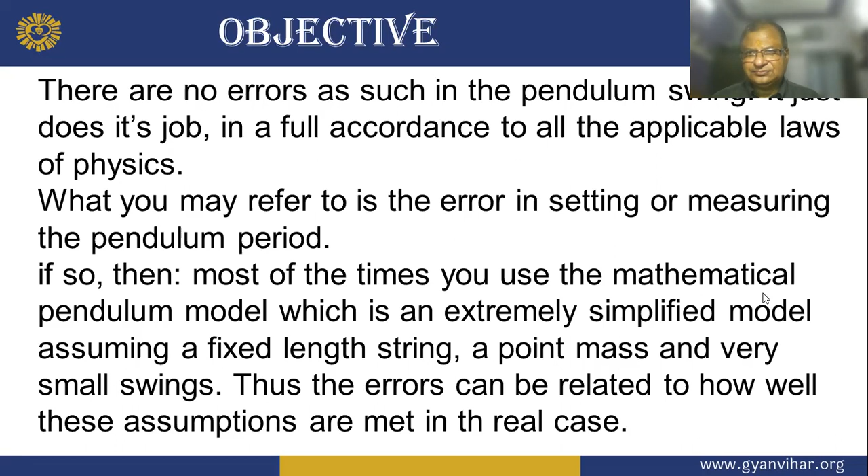The string may be a bit elastic and so change length with the load, or the pivot point may not be a single fixed point but will swing as well, which increases the effective length of the pendulum - use a fixed pivot with a string that does not stretch under load.

Also, the pendulum mass is not a point mass, as there is no such thing. So there may be error in finding the center of mass, plus there is some non-zero moment of inertia around that center of mass, which also changes the pendulum period compared to the ideal model.

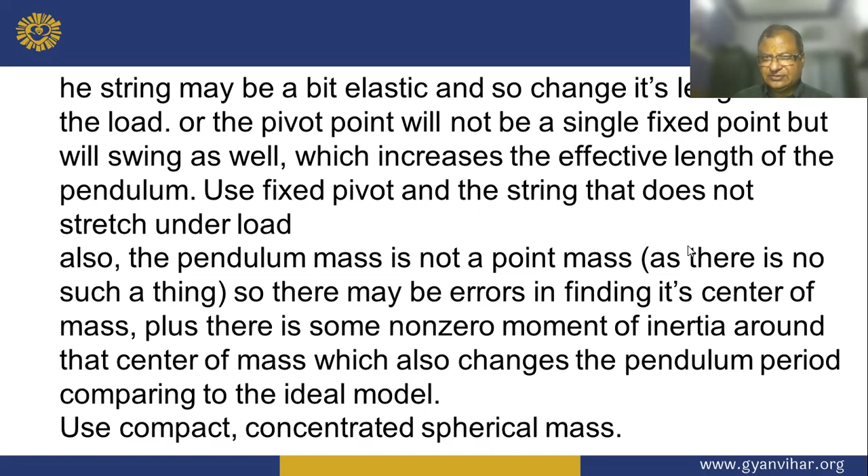Use compact concentrated spherical mass - the pendulum formula is only valid for very small swing amplitude, since usually the formula uses the approximation sine(x) is nearly equal to x for very small x. So use the smallest possible angle. Correct.

Air drag adds a damping force to the pendulum action, similar to adding a damping force to harmonic oscillation, which increases the period slightly. If you use a compact mass for the pendulum, this effect should also be minimized.

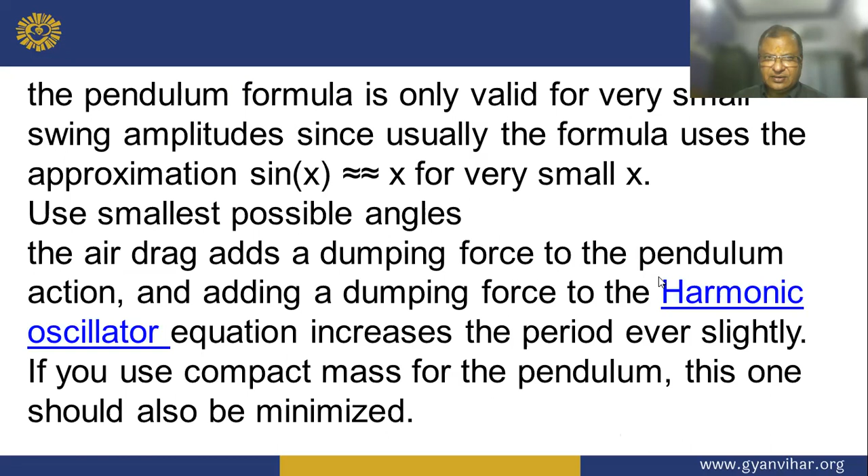Now, what is the definition? Deviation from the absolute value, or from the true average of a large number of results.

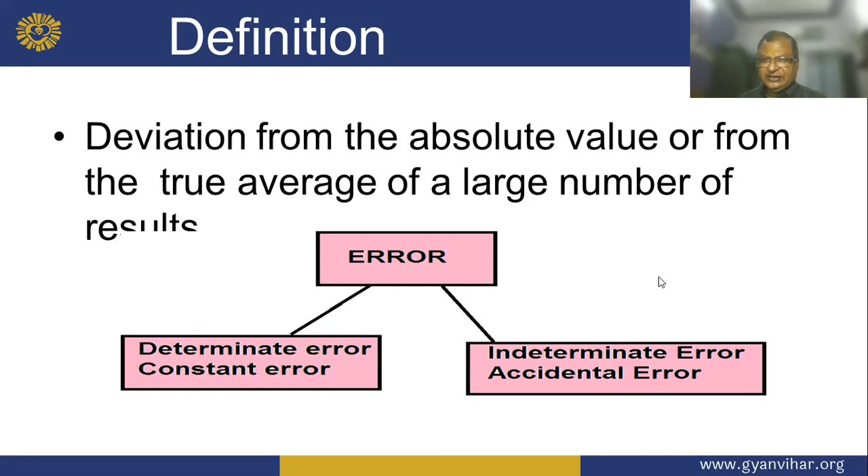So error types: determinate error and constant error, and here indeterminate error and accidental error.

Error in the calibration or operation of the measuring instrument, impurities in the reagent, error in reading, weighing error, and error in matching color and in calculation.

So biased personal error depends on these four factors.

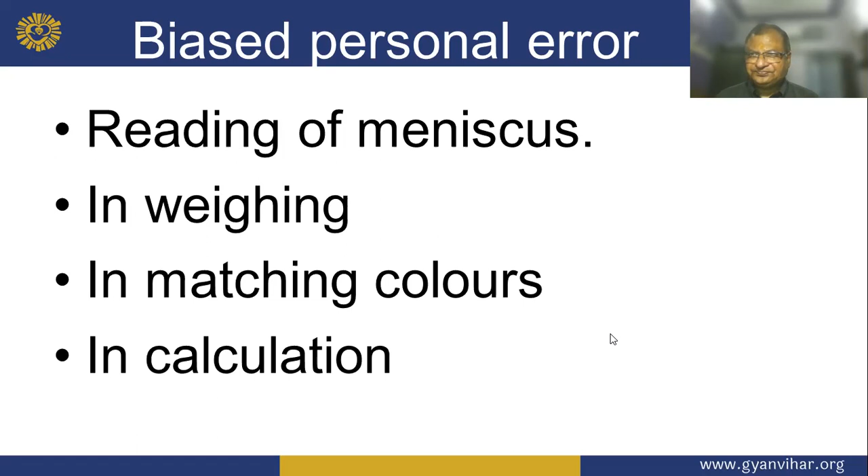Determinate error can be combated by use of calibrated apparatus, use of blanks and controls, several analytical procedures, eliminating impurities, and by carrying out the experiment under various conditions.

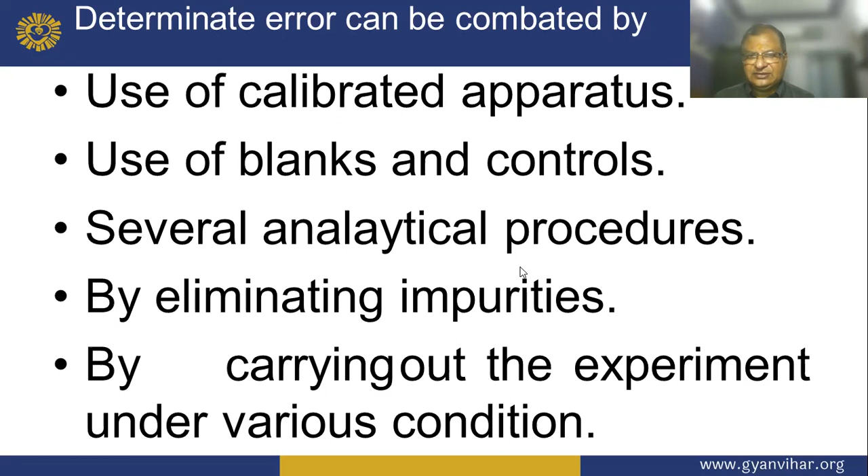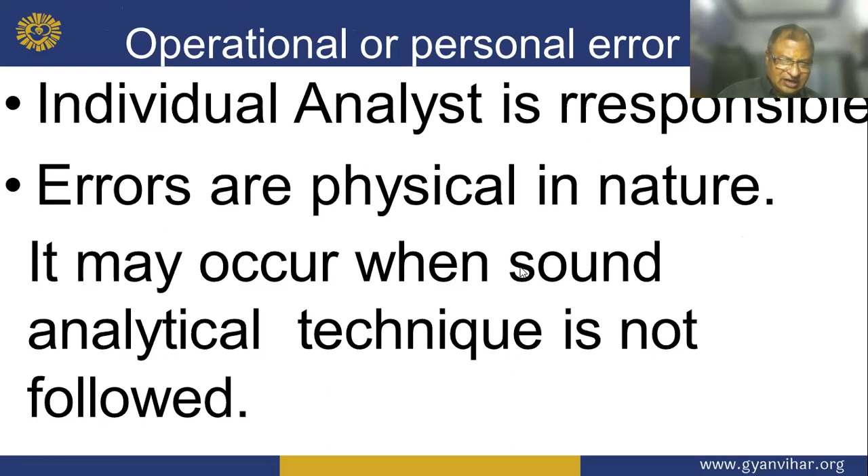And operational or personal errors relate to individual analyst is responsible - these errors are physical in nature. It may occur when sound analytical technique is not followed.

Now, examples of personal error: mechanical loss of material in various steps of an analysis, and underwashing or overwashing of a precipitate.

And ignition of the precipitate at incorrect temperature, and insufficient cooling of the crucibles before weighing.

And allowing hygroscopic material to absorb moisture before or during weighing, and use of reagent containing impurities.

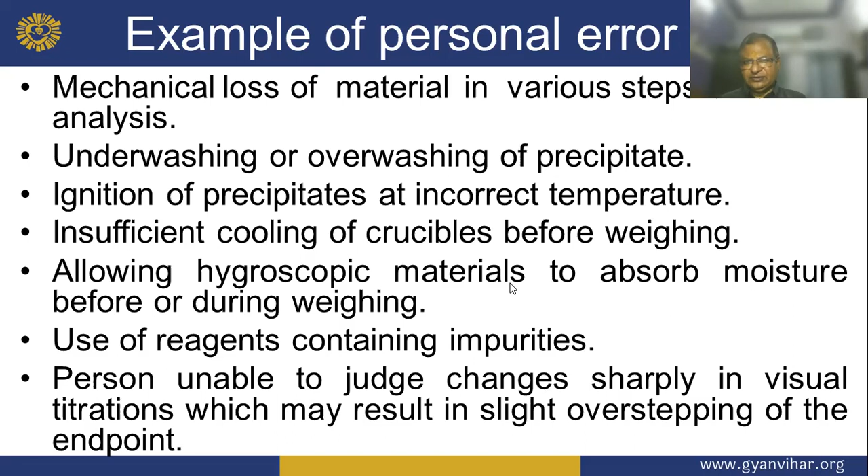Now we will discuss instrumental error: faulty construction of balance, reagent error - the attack of reagent upon glassware resulting in introduction of foreign material, and volatilization of the platinum at very high temperature.

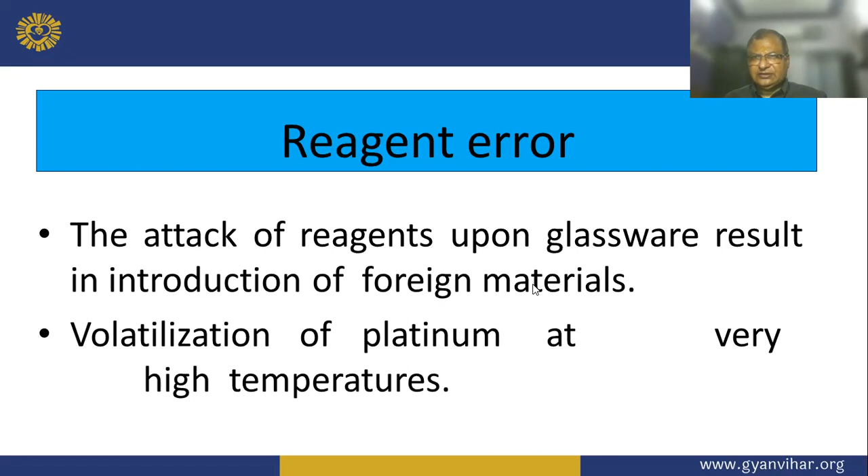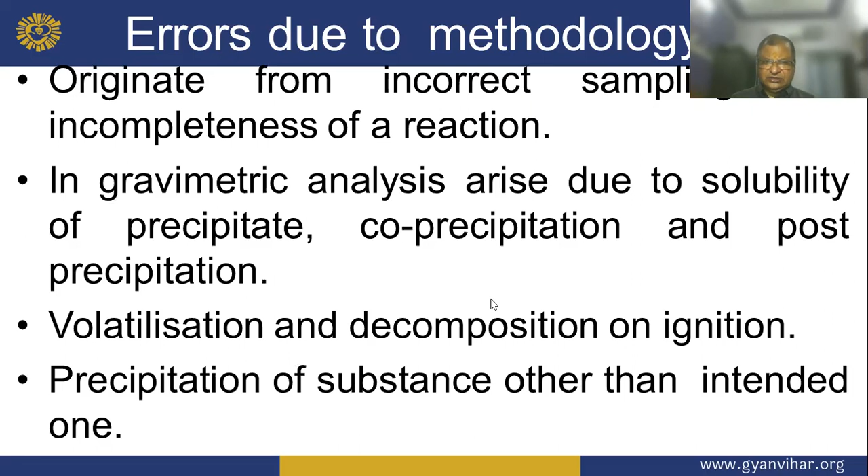So errors due to methodology originate from incorrect sampling and incompleteness of reaction. In gravimetric analysis, errors arise due to solubility of the precipitate, co-precipitation and post-precipitation, volatilization and decomposition on ignition, and precipitation of a substance other than the intended one.

Now, error due to methodology. In titrimetric analysis, error made due to the occurrence of induced and side reactions, and reaction of substances other than the constituent being determined, leading to differences observed and the stoichiometric point variation.

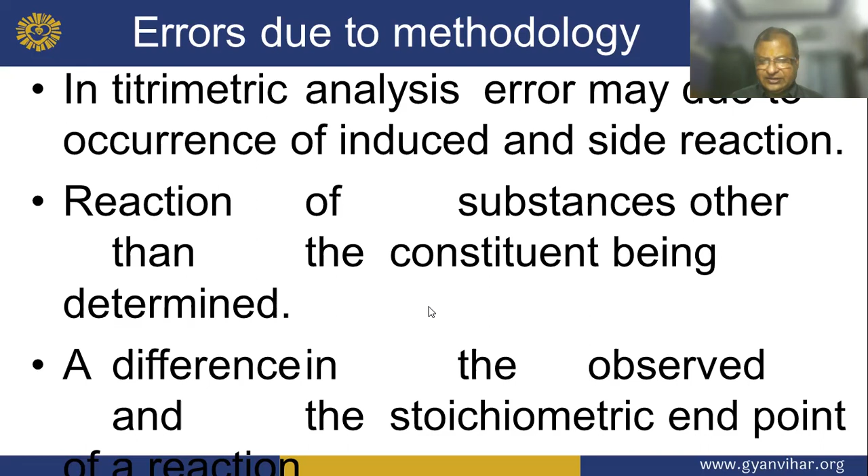Successive measurements made by the same observer under identical conditions produce slight variation and indeterminate error. So its elimination by the analyst is impossible, and error occurs by accident or chance. It cannot be allowed for correction because of the natural fluctuation that occurs in all measurements.

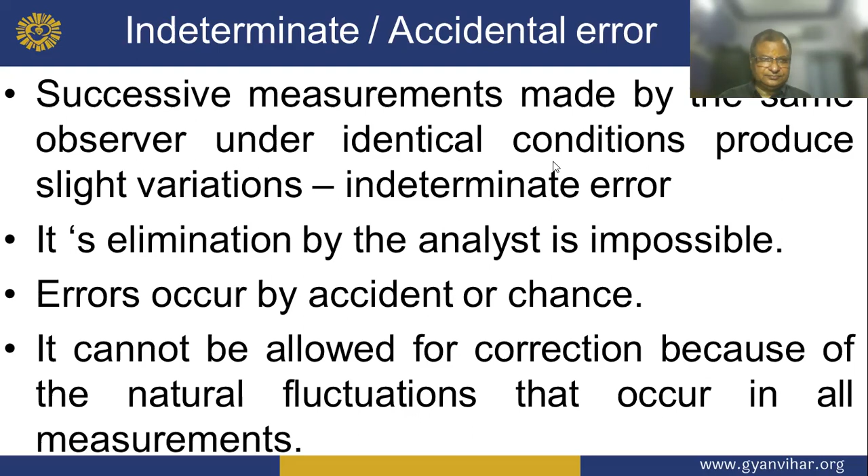These errors arise from random fluctuation in temperature or other external factors. These determinate errors are often called pseudo-accidental or variable determinate error. This error may be reduced by controlling conditions, through the use of a constant temperature bath and oven, employment of buffers, maintenance of constant humidity and pressure, reading fractions of a unit on graduates, balances and apparatus - this may reduce pseudo-accidental error.

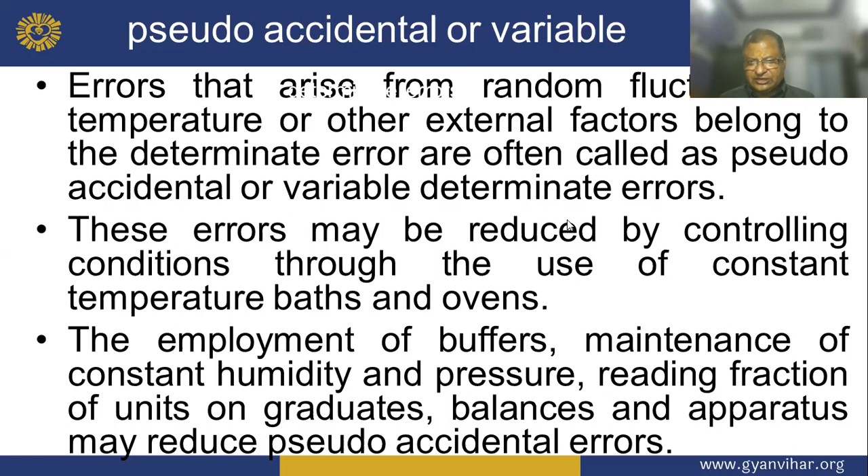Now, minimization of error. The calibration of the apparatus - all apparatus like weights, flasks, burettes and pipettes should be calibrated, so that the apparatus correction is applied to the original measurement.

In some cases, error cannot be eliminated, so a correction is applied for that effect, and impurity in a weighed precipitate may be determined and the weight corrected.

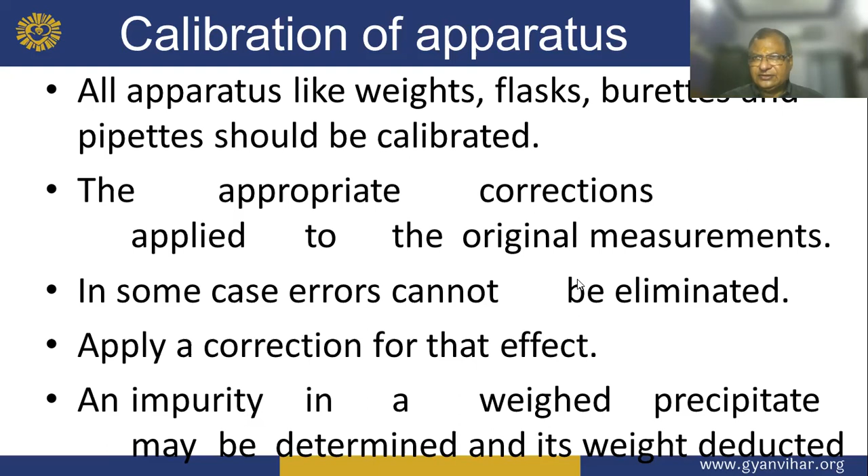Now, running a blank determination. It is carried out as a separate determination, the sample being omitted, under exactly the same experimental conditions as employed in the actual analysis of the sample. The object is to find out the effect of the impurity introduced through the reagents and vessels.

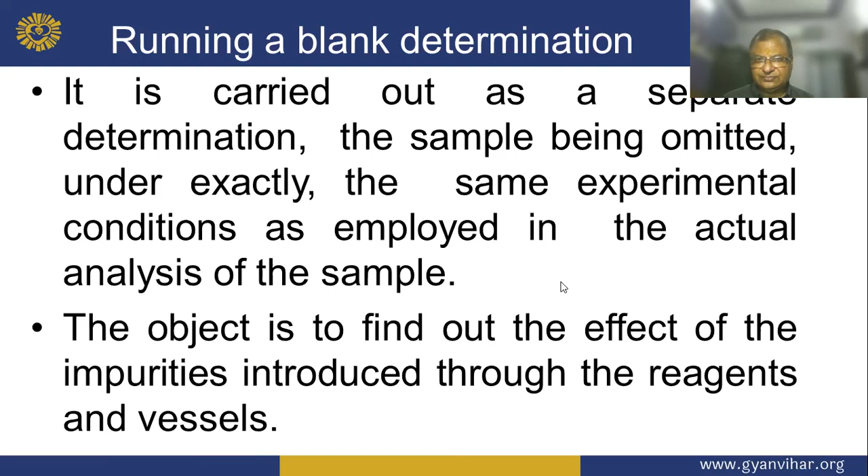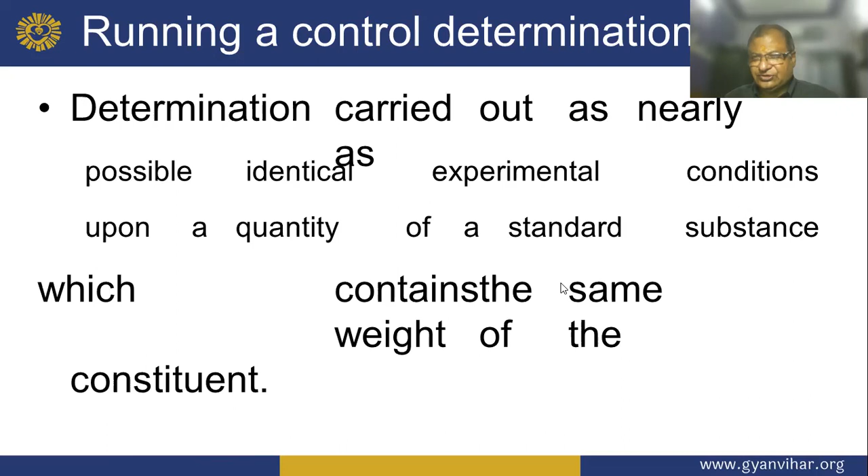Now, running of the control determination. The determination is carried out under as nearly as possible identical experimental conditions, upon a quantity of the standard substance which contains the same weight of the constituent. Determination of strength of HCl, both by titration with a standard solution of strong base and by precipitation and weighing as AgCl.

If the results obtained by two radically different methods are concordant, it is highly probable that the values are correct.

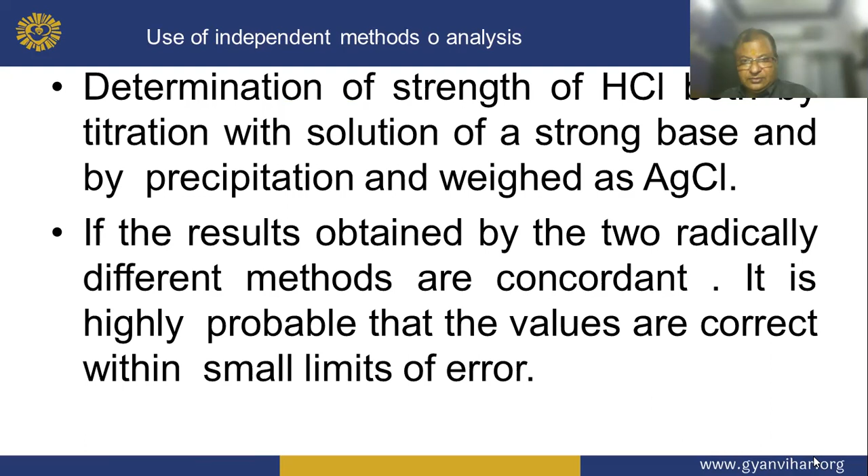It serves as a check on the result of a single determination and indicates only the precision of the analysis. The value obtained should not vary by more than 3 parts per thousand, and if a larger variation is there, it must be repeated until satisfactory concordance is obtained.

Now, duplicate, triplicate determinations suffice. A known amount of the constituent is added to the sample, which is then analyzed for the total amount of constituent present. The difference between the analytical result of the sample with and without the added constituent gives the recovery.

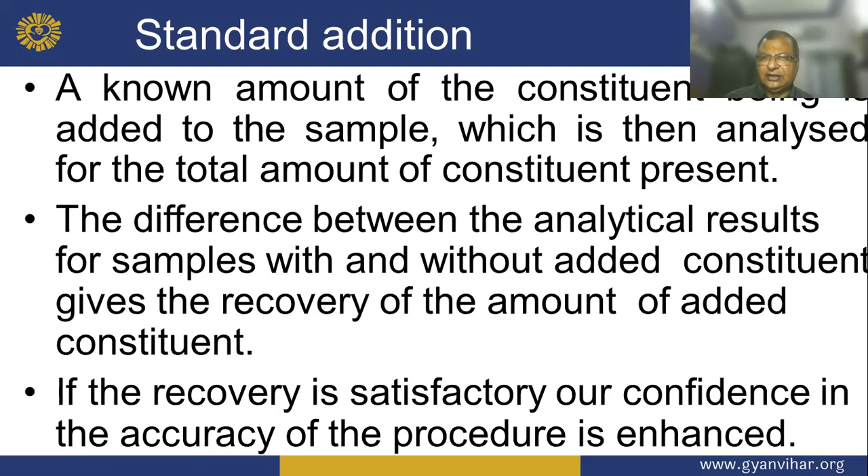Even under constant experimental conditions - same operator, same tool, same laboratory, short time interval between measurements - repeated measurement of a series of an identical sample always leads to results which differ among themselves and from the true value of the sample.

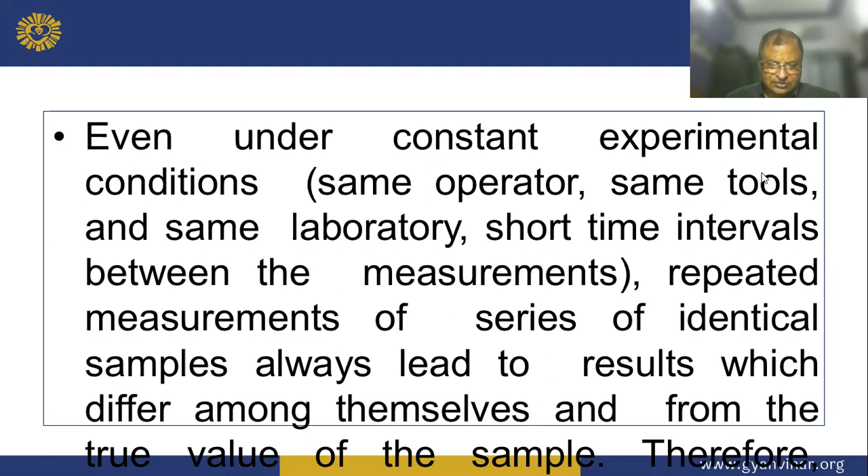Therefore, random errors are the component - measurement error that varies in an unpredictable manner in replicated measurements and measuring technique.

Measurement error that varies in an unpredictable manner in replicated measurements and measuring technique, that is the noise. Random error is the component of measurement error that varies unpredictably in replicated measurements and measuring technique - that is noise, sample property such as inhomogeneity, and chemical effects such as equilibrium, even under carefully controlled conditions.

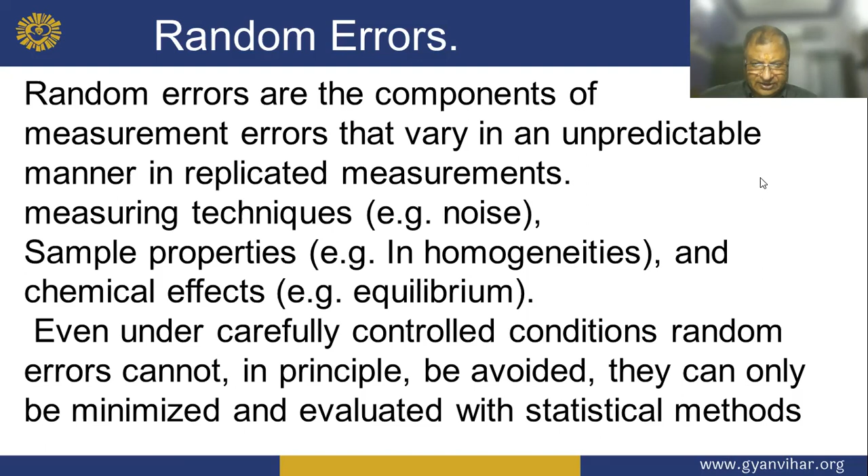Even under carefully controlled conditions, random error cannot in principle be avoided. It can only be minimized and evaluated with statistical methods.

The closeness of agreement between the results, according to their character and magnitude, is classified as random and systematic.

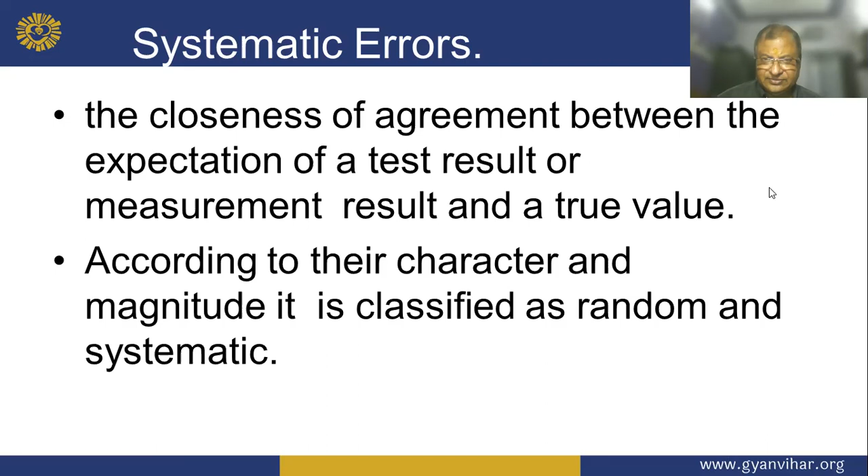Now accuracy: the concordance between the data and the true value. It is the agreement between the data and the true value.

If the true value is not known, the mean calculated from results obtained by several different analytical methods, which are very precise and in close agreement with one another, may be considered the value in a practical sense.

The difference between the mean and the true value is known as the absolute error.

The relative error is found by dividing the absolute error by the true value. So the difference between the mean and the true value is known as the absolute error.

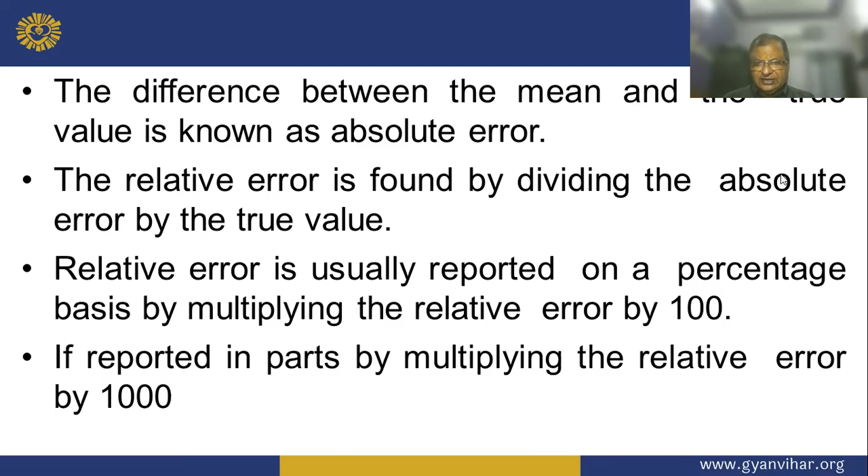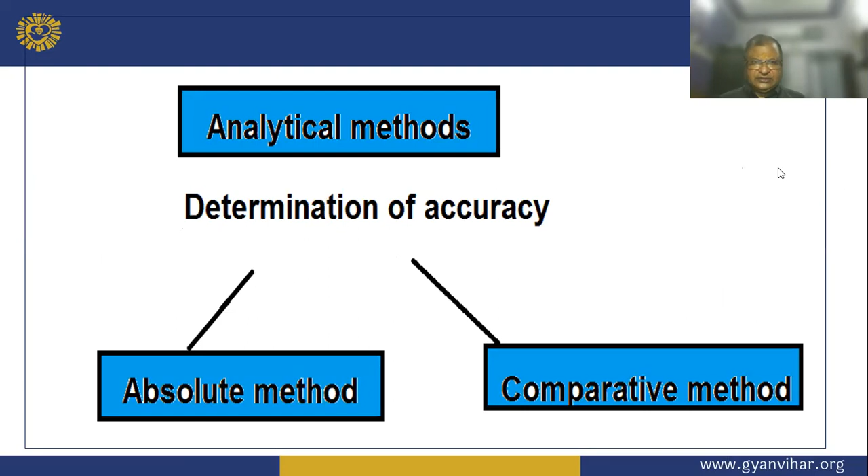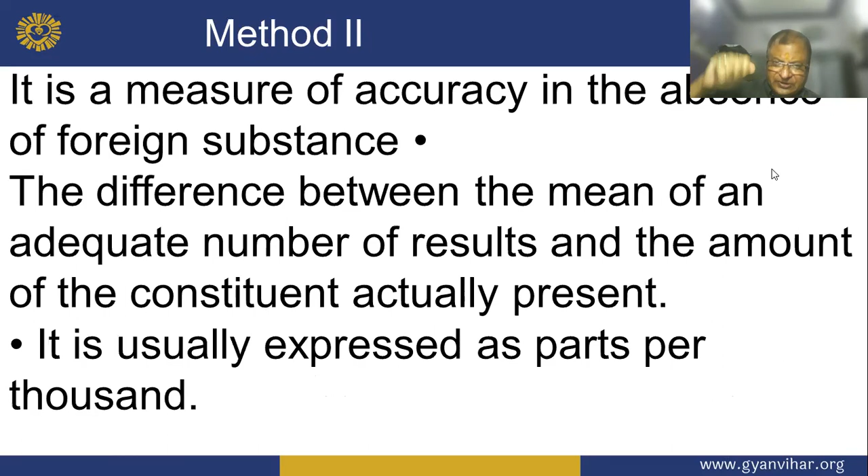Now, analytical method: it is the measure of accuracy, the absence of foreign substances, and the difference between the mean of the adequate number of results and the amount of constituent actually present. It is usually expressed as parts per thousand.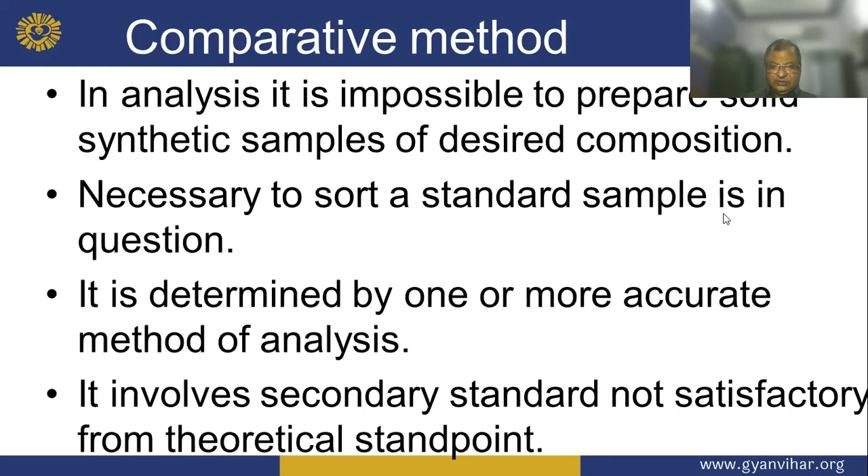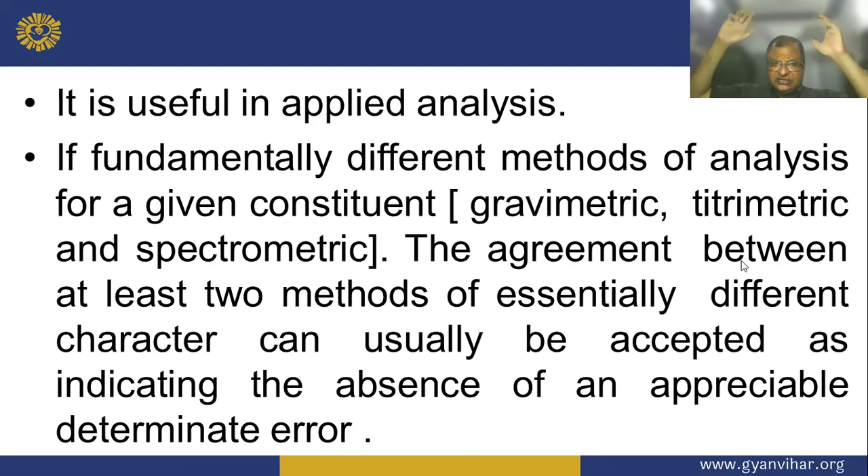If fundamentally different methods of analysis for a given constituent, such as gravimetric and spectrometric, show agreement between at least two methods of essentially different character, this can usually be accepted as indicating the absence of an appreciable determinate error.

This is precision: the concordance of a series of measurements of the same quantity.

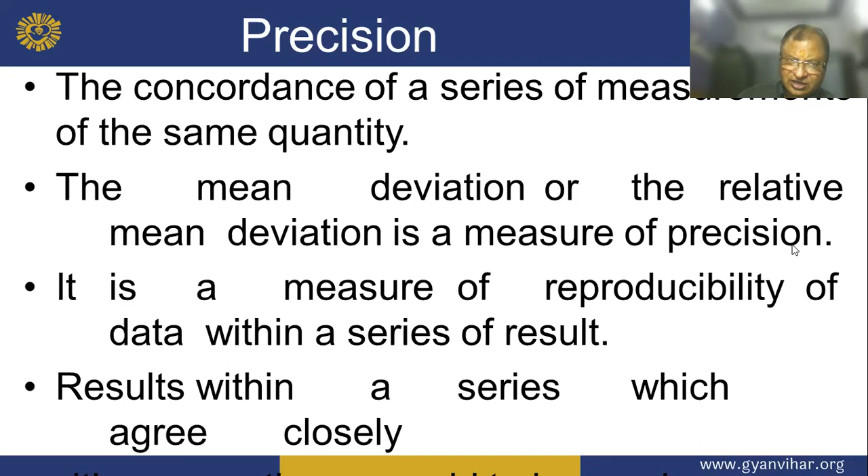The mean deviation, or relative mean deviation, is the measure of the precision of a series of results which agree closely. It is the measure of reproducibility of data across a series of results.

Precise results are not necessarily accurate, for determinate error may be responsible for the inaccuracy of such results in a series of measurements, and it is usually reported as an average.

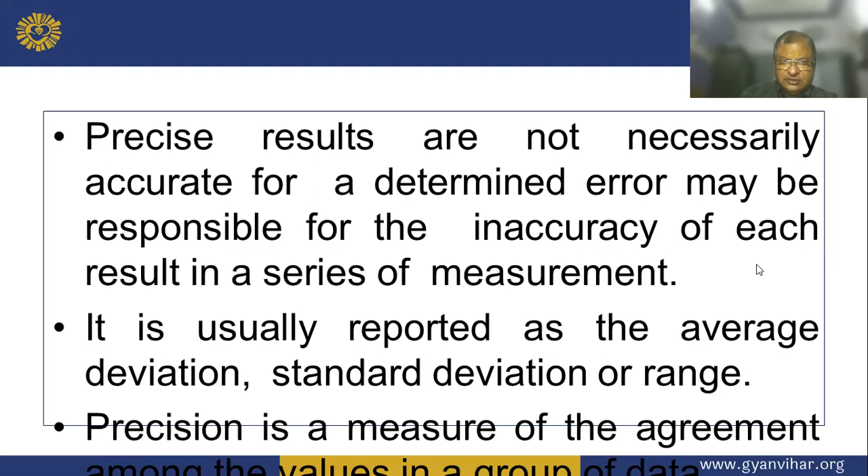Analyst one is accurate and precise, but analyst two, though precise, was less accurate than analysis one. This is established during the development stage and should include day-to-day fluctuation, lab-to-lab variation, small modifications in technique, and the skill of the analyst, covering undetected operational and instrumental factors.

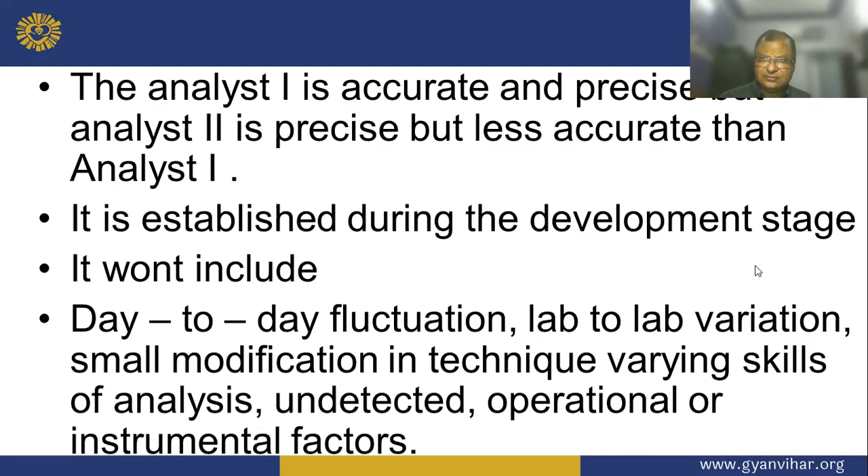No measurement is accurate. Sources include parallax error, incorrectly reading the measurement, calibration error if the scale is not accurately drawn, and zero error of the device.

Parallax error is incorrectly reading the measurement. Calibration error is when the scale is not accurately drawn. Zero error occurs if the device's zero is not correctly set.

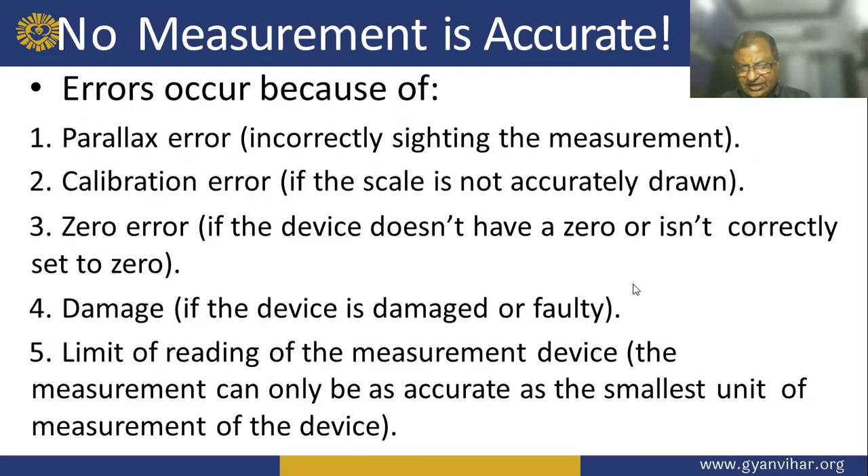Also consider if the device is damaged or faulty, and the limit of reading of the measurement device: the measurement can only be as accurate as the smallest unit of measurement of the device.

This is the chain, used for measurement, and this is the pin.

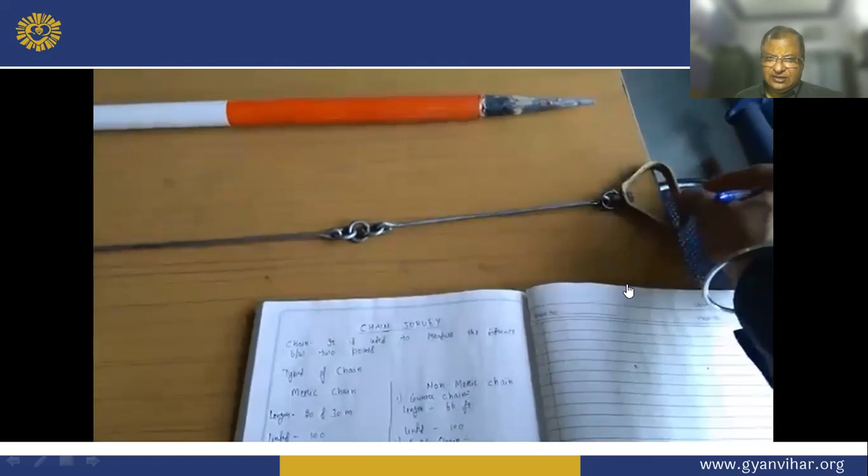So this is written in the field book, and every reading should be written in the field book for the chain, and very carefully, because there will be chances to error.

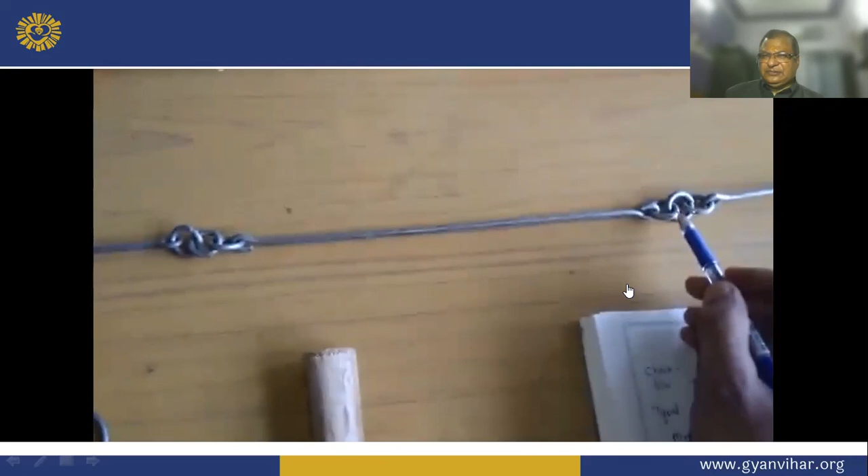So this is the still grip, and this distance is 10 centimeter, and you will keep this is the center, and this is the corner, and this is also the corner.

And this is the engineer's chain. This is only for use in the measuring in the irrigation project. Engineer's chain.

And cancellation of the, this is the tally, and two tally means 10 meter, one tally 5 meter, two tally 10 meter, and three tally 15 meter. This is the tally. This is one, two tally, and this is the three tally.

And we will write the field book of the detail.

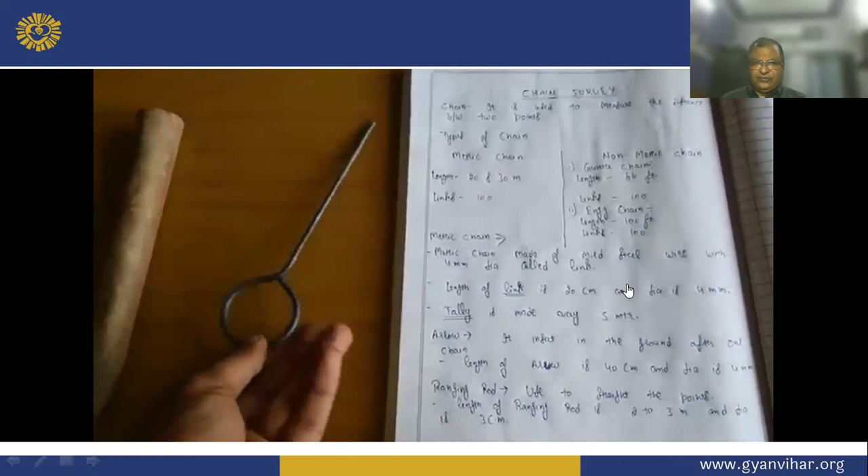Now we will show in my notebook on which place you have started, on which place you have run, and you have used this instrument for taking the location. Taken of location, so you will read on this.

Now it's A and B station. So how we will measure? A station will measure to stand, and A station will use a foresight to go the person, one in right, one in left.

And this is what you have to write in the notebook. The entire notebook should be kept, and this is the point. What is the distance of point A and B?

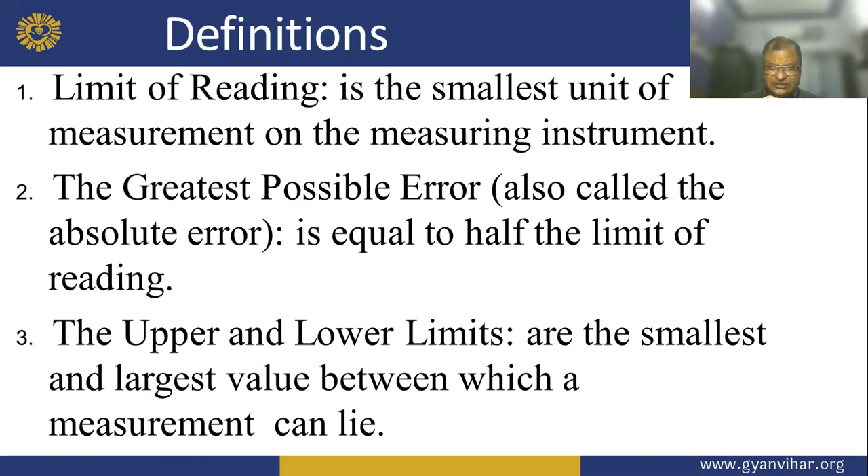Now basically three types of error are standard: gross error, systematic error, and random error. Gross error mainly covers human mistakes in reading instruments and in recording or calculating measurement results.

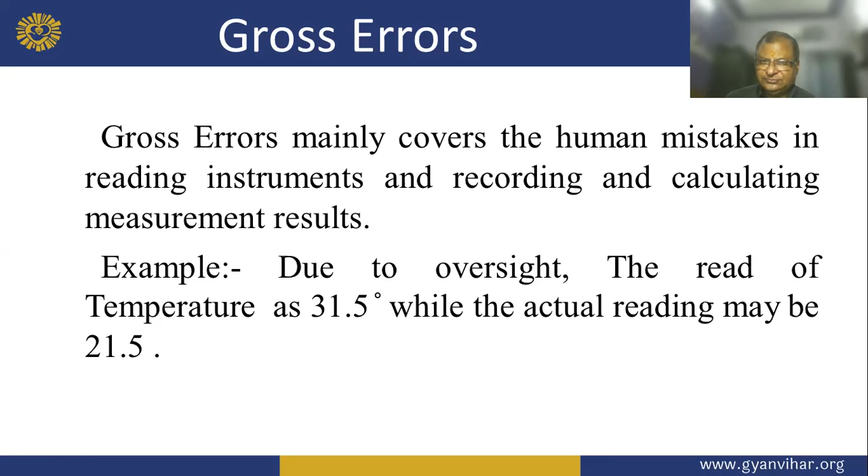An example, due to oversight, gross error mainly covers human mistakes in reading instruments and in recording and calculating measurement results. So example, due to oversight, the reading of temperature taken at 31.5 degrees while actual reading may be 21.5 degrees. Correct? This is the example.

So gross error may be of any amount and therefore mathematical analysis is impossible. These are avoided by adopting two means: great care must be taken in reading and recording the data, and two or three, even more readings should be taken of the quantity under measurement.

Now systematic error is classified into three categories: instrumental error, environmental error, and observational error.

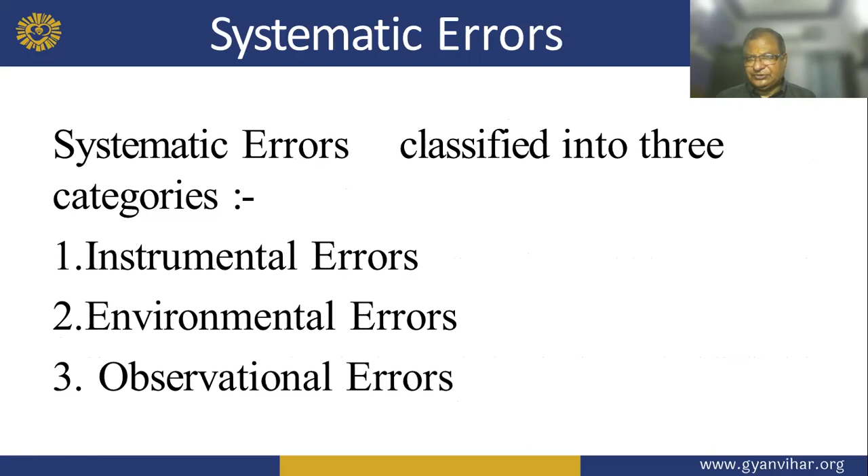So, dear boy, you have read about the error. I will request you to give the reply of the MCQ now on this topic.

Question number 1. Which of the following is caused by careless handling? So the correct answer is B, gross error.

And next question: a system will be error free if we remove all systematic error. Is it correct or false? It is false.

Now next question is, a negative declination shows the magnetic meridian is to the, so which is the correct answer? Correct answer is B, western side of the true meridian.